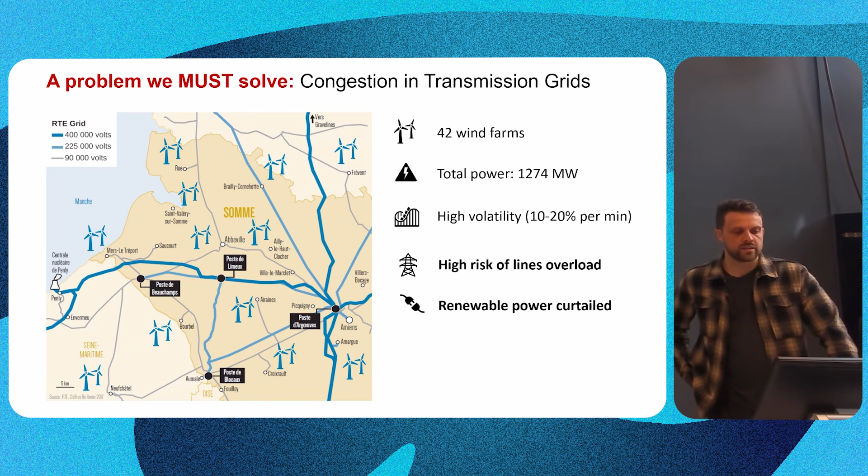This area is particularly interesting because there are many wind farms, 42 different wind farms, and in aggregation they generate over 1 gigawatt of power. And since this power comes from renewables, it's highly volatile, so they can experience oscillations of 20% on the time scale of minutes. So this is a risk for the stability of the grid and for the reliability of the grid, because it can lead to line overloads and damage to the equipment.

So what operators do to counter this is brute force curtailing of renewable power. What this means is they just take renewables off the grid so that they don't cause these overvoltages. And this is a waste, of course, because this is green energy that could be used for better purposes.

There are two possible solutions for this. One is what they call physical reinforcement, meaning just building new lines. Now they can accommodate more capacity, so renewable energy is not wasted anymore. But this is very costly, as you can imagine.

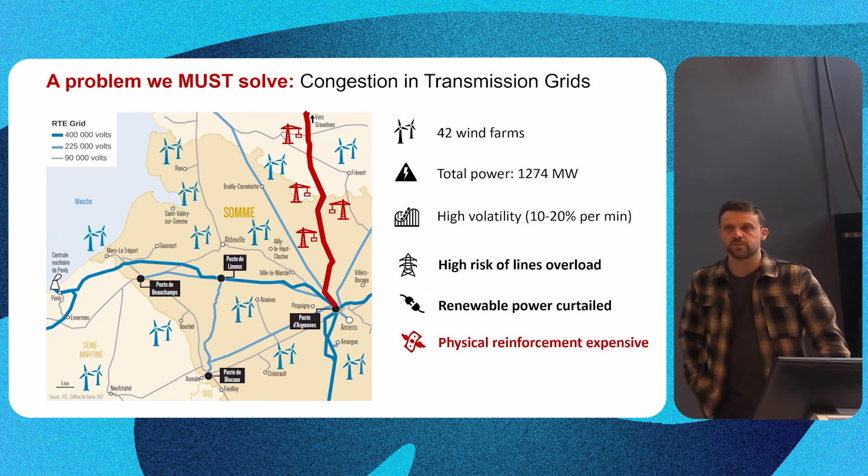And the second option is what they call virtual reinforcement, but what we control theorists would call control. This essentially accounts for using the assets on the grid, so generators, flexible loads, energy storage devices, to stabilize the grid in presence of this renewable generation. What this means in practice is modulating the set point at which these assets operate in order to make sure that the voltages and currents of the line stay within the limits. And this is of course cheaper because there's no major construction project involved. It's just applying smart control into the way we operate existing assets.

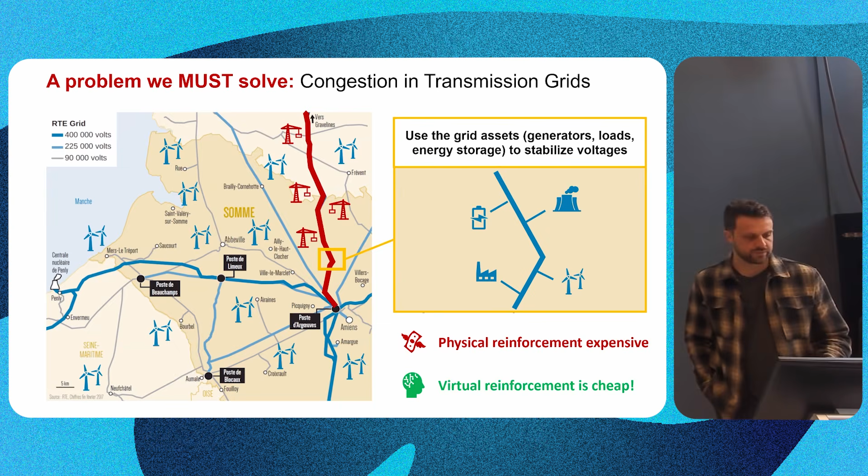Let's take a look at this problem, but from a math point of view. So what this really is, is a steady state optimization problem of this sort: we're looking for minimizing a cost function phi by choosing judiciously these control inputs U.

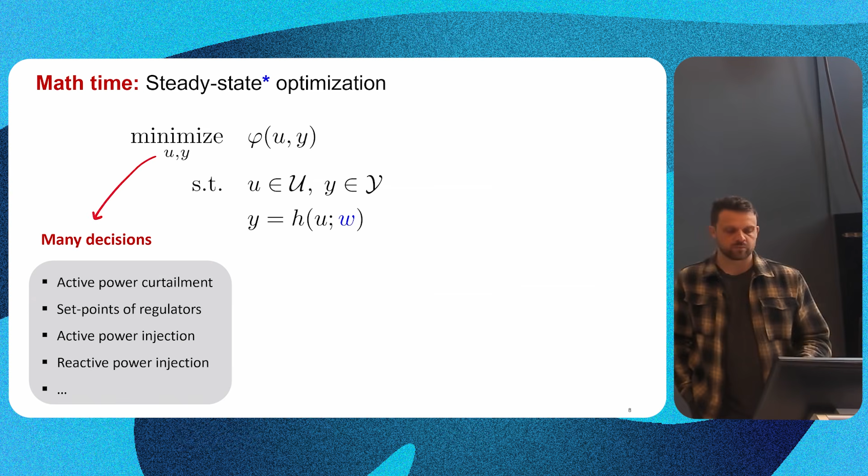These control inputs could be many things: for example, active power curtailment, set points of the regulators, active and reactive power injections of these assets that operators have on the grid. And the objective could be different things, but usually we minimize the curtailment, so we don't want to waste renewable energy, and perhaps we want to track some operational profiles that are given beforehand.

This is subject to some constraints. There are actuation limits, so we don't have infinite active and reactive power to use to regulate the grid. There are also physical constraints that are more important for us: we want the voltages and currents on the lines to stay within limits that guarantee reliability of the grid. These are the constraints on the Y.

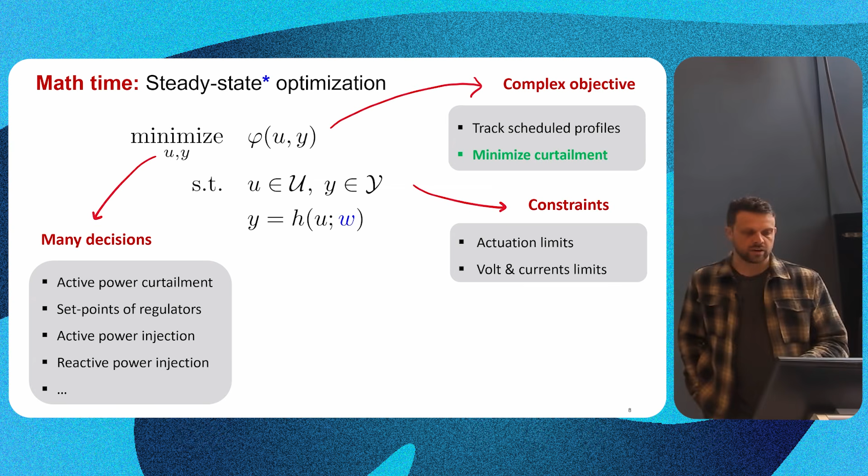I didn't mention this explicitly, but there is of course a direct connection between the control inputs U and the output that we measure in the grid, the voltages and currents, represented here by Y. This connection is through a nonlinear input-output map, H, which represents really the physics of the grid, or in other words, the power flow equation.

In other words, voltages and currents on the lines of the network are a nonlinear function of the reactive and active power that we inject. Not only that, but it's also a function of active and reactive power injected by some external entity that operators do not have control over. We represent that by this variable W, which from a control point of view is an exogenous disturbance.

This could be, for example, uncontrollable loads or variable microgeneration. This is why at the top of the slide we have this asterisk on top of steady state, because the W varies over time. So this looks like a steady state optimization problem, but it's really a parametric steady state optimization problem that varies over time. What operators are interested in is not just regulating the plant, the transmission grid, but tracking solution trajectories of this slowly time-varying optimization problem.

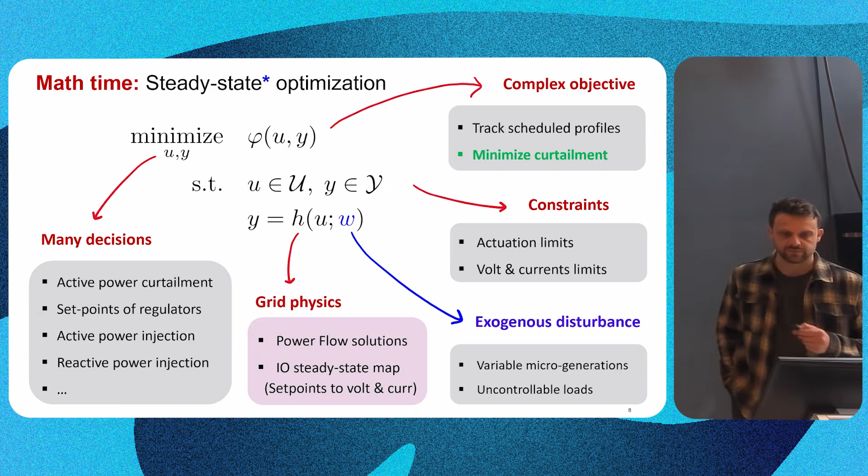Let's take a look at what industry does right now. We would paraphrase that as control theorists as offline optimization. They use forecasts of the disturbance that happens on the grid over the next day, and then they use optimal power flow solvers. We can represent these solvers as an interconnection between a model we have of the grid, this hat H, a power flow model, and some optimization routine that uses this model to find the optimal injection in the grid.

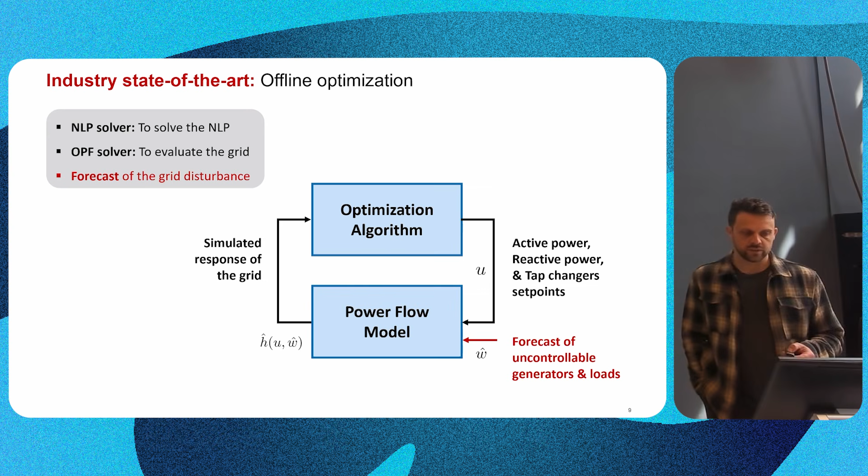This is done completely within your computer. There's no implementation; it's run until convergence. Then the outcome of this routine is deployed on the real system, which operates, of course, online.

We would call this feed-forward optimization, essentially, in control. There are some problems: it's heavily model-based, so we need a model of the grid in order to run this. It could be computationally intensive if you try to solve this problem on the scale of a whole country or a continent. And we know, as control theorists, that feed-forward is not robust to model uncertainty and also to external disturbances.

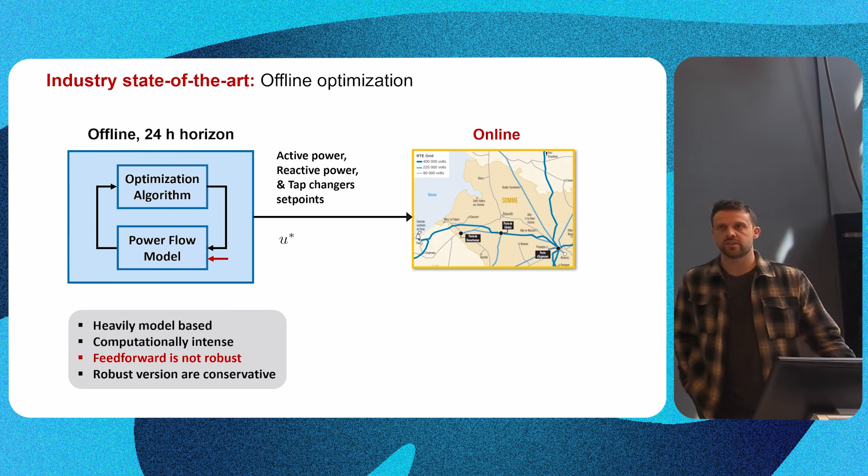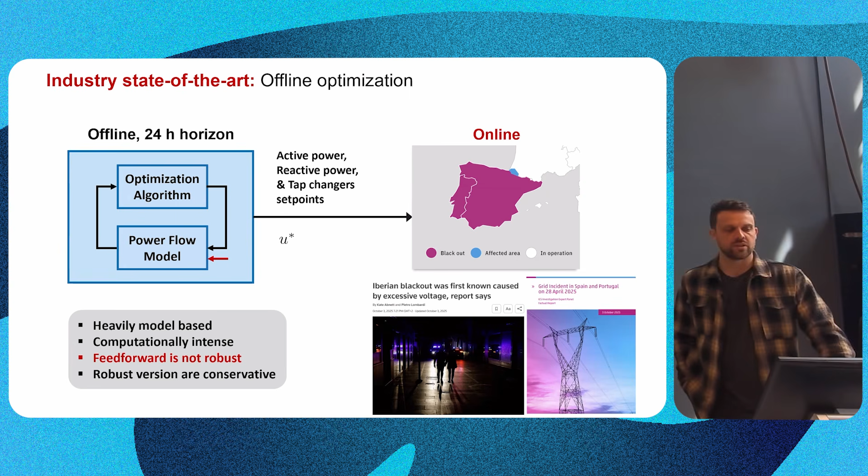You may have heard of this episode on the Iberian grid, I believe in April or May of last year, that led to a major blackout. Actually, one of the reasons why that happened is excessive voltage on the grid and inappropriate response by the operators. So this is a very relevant problem at the moment.

A solution that has been proposed in the literature is what we call online feedback optimization. The main idea is to just get rid of the model of the physical grid and directly connect our optimization routine with the real physical system. This creates a cyber-physical interconnection between an optimization routine and a physical plant.

What are the advantages of this approach with respect to what we've seen before? There are a few. It's computationally light — we don't really need any model of the grid. We just outsource the evaluation of the model to the physics itself.

Feedback has this forgiving nature. So even if you have, let's say, wrong information about measurements or input-output models, the feedback automatically corrects it. And it's almost model-free. I'll get back to that.

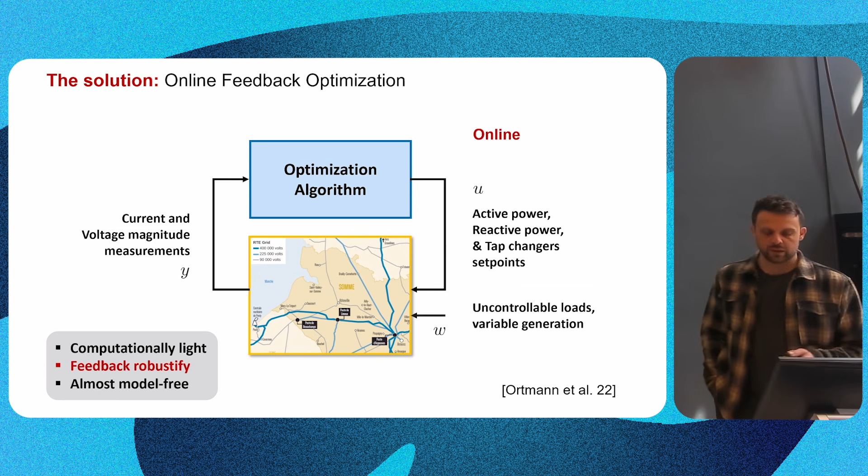So it's a great thing, but let me dive a little bit deeper into this so you can have a better idea on how these methodologies work, because so far I've kept everything very high level.

This is the steady state optimization problem that operators are trying to solve - I've shown it before. For the purposes of keeping this derivation neat, we get rid of the output constraints, and we can use, for example, some soft constraints. So instead of enforcing it in a hard way, we just put an extra cost, an extra term in the cost function that penalizes deviation.

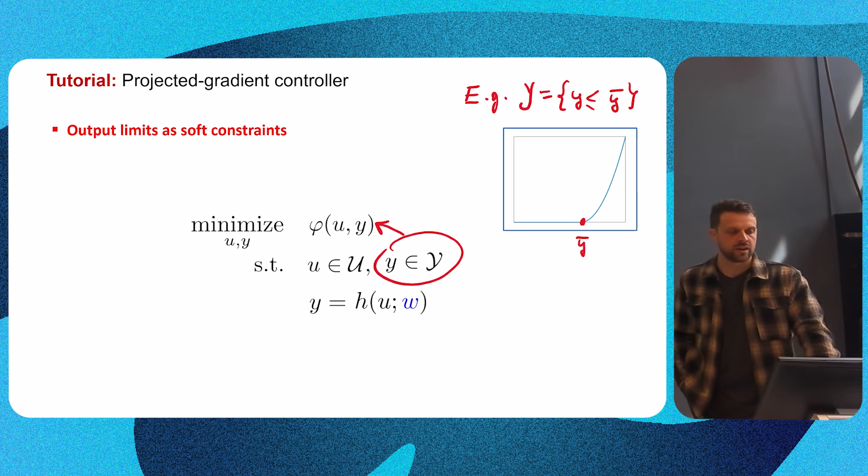Here on the top right of the slide is an example of this. We're in this simplified setup. The next thing is to just get rid of the y - we see the y, it's a redundant variable.

We can just substitute it into the cost function. Now we're optimizing our u. Then at this point we have an optimization problem that we can probably solve with some routines that we know. Do you want to guess what something that you could run onto this to find a solution?

An optimization problem? An optimization algorithm? Gradient descent. Yeah, so gradient descent with projection, because we have constraints on the u. So this is something that we can run.

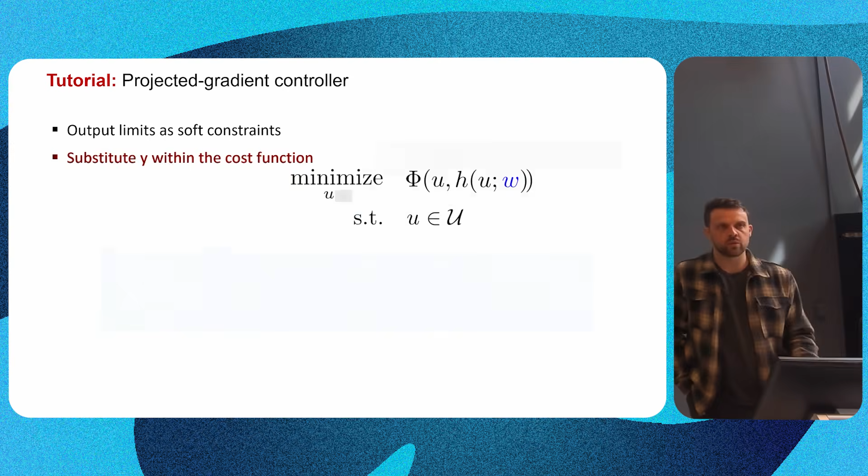This is how it looks like. So the next estimate of the solution of this problem is given by taking a step of length gamma towards the descent direction of the cost function, so the gradient, and then we project everything into the constraints u.

The expression in the second line essentially shows you how the gradient looks like, because we have a composite objective function, and this is how we can work out an expression.

So we have a composite cost function with two arguments. So we have to take the derivative, the gradient with respect to the first argument, and then the gradient with respect to the second argument.

In order to derive it, we need to apply the chain rule, because it's a composite function. So we take the Jacobian of the mapping H, we transpose it, and then we do the multiplication for the gradient with respect to the second argument.

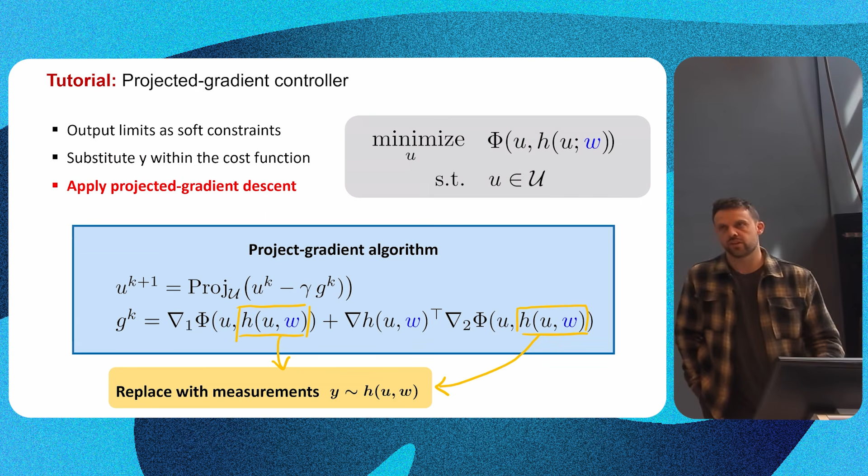Now, here's the kick. What feedback optimization does, differently from feed-forward, is it does not rely on a model of the grid in order to evaluate the H, but just replaces that with measurements that you take from the real grid. These are essentially, if you have very good timescale separation, very close to the actual steady state of the system.

There's another bit that I didn't mention explicitly, but it's very important - this gradient of the steady state mapping of the system that people call input-output sensitivity. This is something that is, in theory, not given a priori, and at least in the context of the grid, it can be derived, or a good approximation of this can be derived offline just based on the parameters of the grid itself.

The difference with respect to having dynamic models is that you don't need to know the dynamic models. You can derive this without knowing the real dynamics of the system, just based on the parameters of the grid, like impedances, resistances, etc.

Okay, we have this routine, and then we can write it explicitly as this cyber-physical interconnection. We take the measurements from the grid, currents and voltages, feed it into the projected gradient iteration, and then what comes out of this iteration we feed back to the grid.

There are several conceptually related works to this. The first that comes to mind is extremum seeking. The main difference is that in extremum seeking you have a less stringent assumption, in the sense that you don't know the gradient, you cannot evaluate the gradient at all. So you need to rely on zero-order information in order to estimate it.

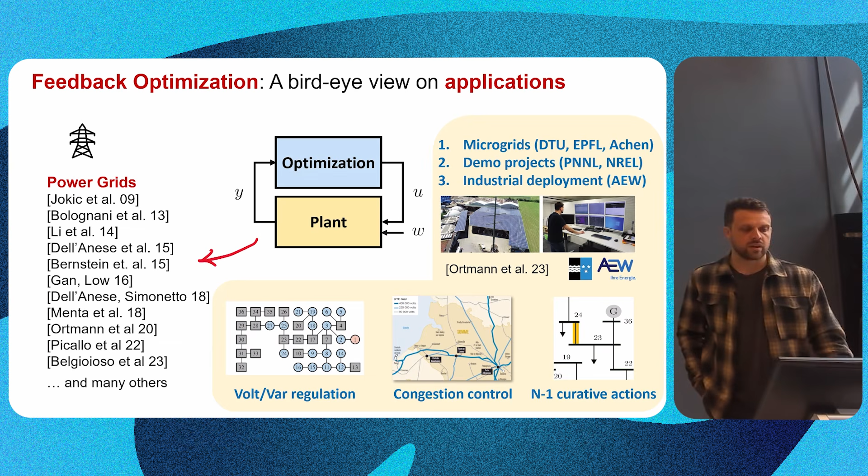For example, it's been proposed also for dealing with N-1 curative actions, essentially resilient action when one link of the grid fails. Also Volt/Var regulation in distribution systems, and it has been deployed in real microgrids by demonstration projects. My colleague Lucas also deployed it in a real distribution system in the canton of Aargau in Switzerland, and it's currently working and serving 100,000 people, regulating the power grid there.

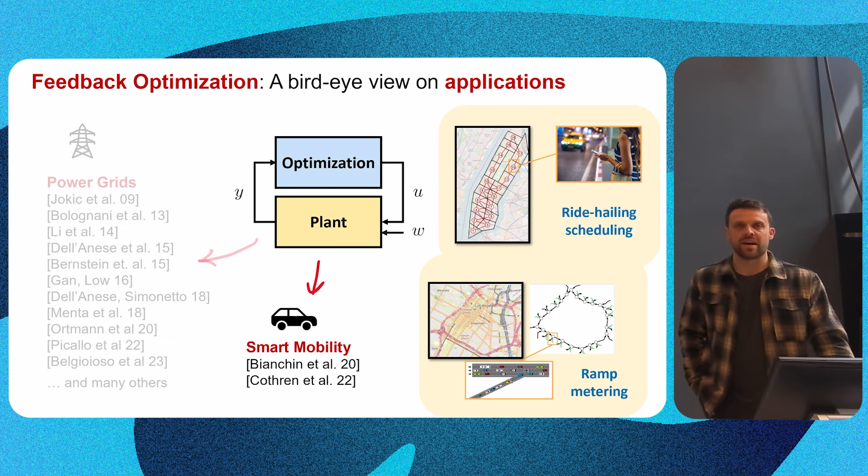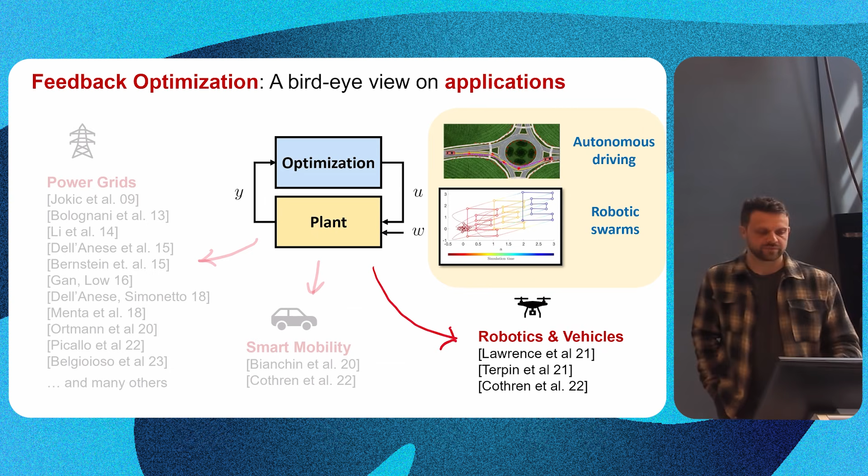There have been some applications in robotics for autonomous driving and coordination of multi-agent autonomous systems, and some applications to industrial processes. I don't know much about that, but I'm sure Marta, for example, knows way much more.

Okay, so applications are a lot and very interesting, but what about theoretical guarantees? Do we have a theoretical understanding of what happens when we interconnect an optimization algorithm with a physical system in this way?

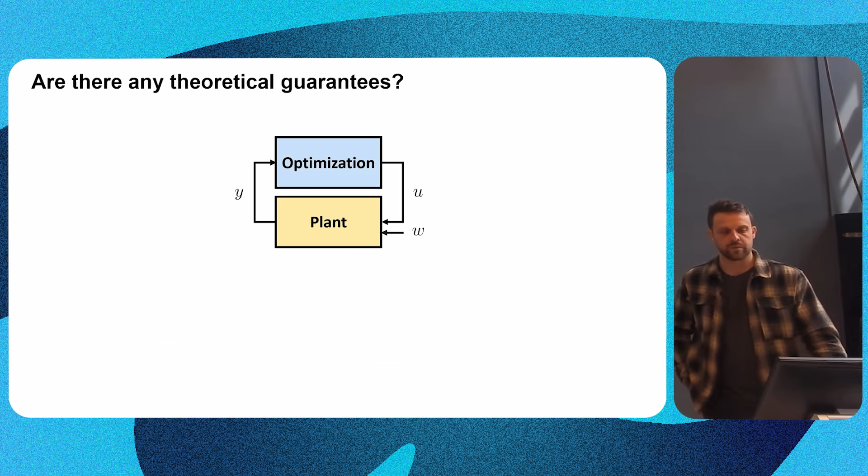So there are various questions that have to be considered. I would say that probably the most popular and important one is closed-loop stability. We know that when we interconnect two dynamical systems, the interconnection could be unstable even if the two pieces taken singularly are stable. So we would like to come up with some guarantees that show us that the interconnection remains stable and the optimization/controller does the job that we want it to.

Tracking performance: we mentioned that we are not really interested in just regulation to a steady state, but we want to track solution trajectories of this slowly time-varying steady-state optimization problem. So we would like to know how good we can track these solution trajectories, what the tracking error is, and if there are any guarantees there.

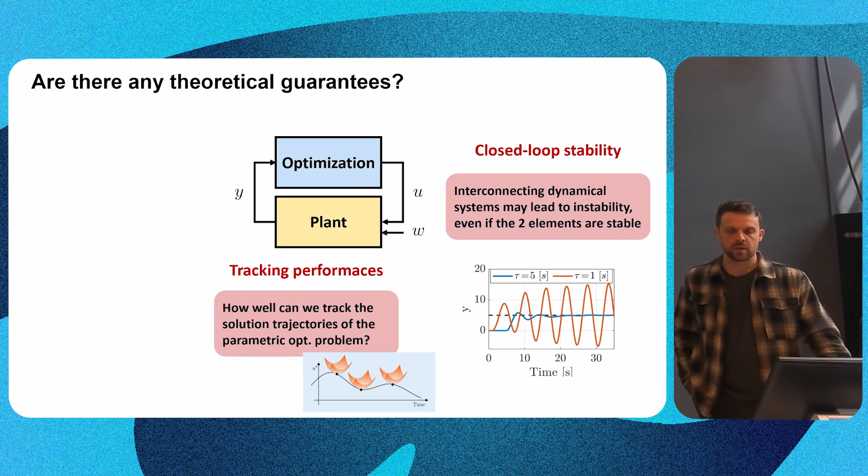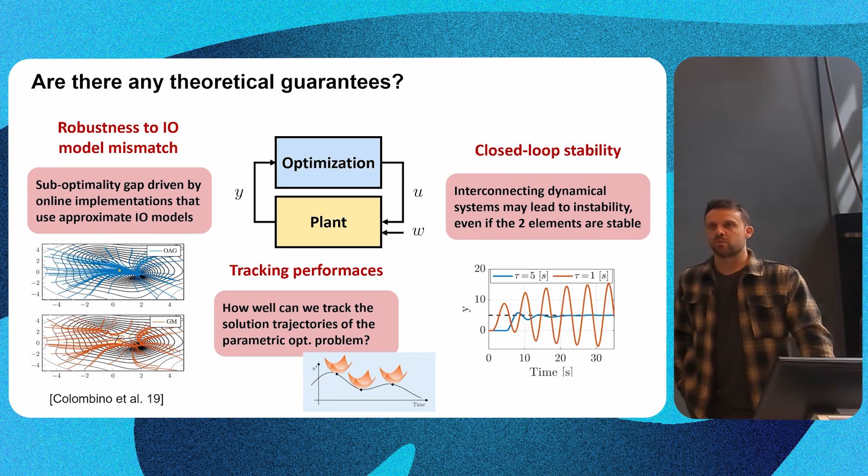And another one that is very fundamental but less investigated is robustness to input-output model mismatch. The underlying assumption of feedback optimization is that we know the sensitivities, the input-output behavior of the system. This is not always true in practice, and when there are errors there, you would like to have some guarantees that things will still work well. There's a nice paper from Marcello Colombino that studies that, and I believe not much more after that, but it's an interesting point.

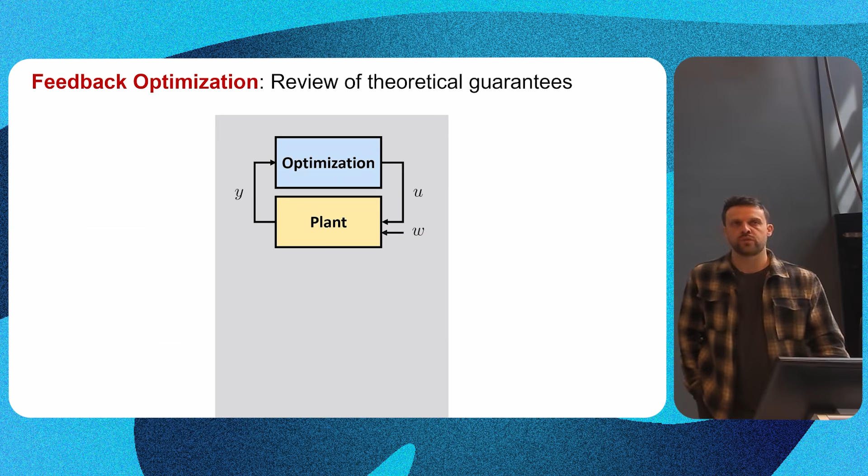Okay, so let's focus on closed-loop stability and tracking performance. I just want to give you an overview of what's out there in the literature regarding these theoretical questions. I would say we can categorize it into two main blocks.

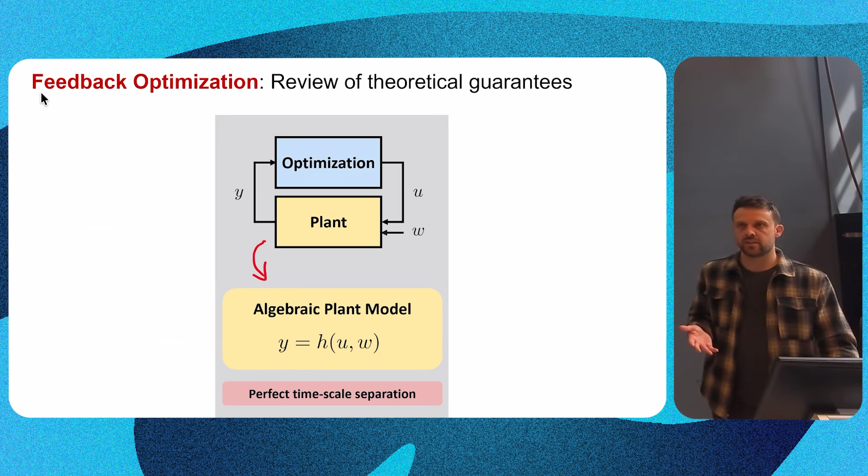The first one works under the assumption of perfect timescale separation. So they assume the plant can be represented by an algebraic map, giving instantaneously the output at steady state of the plant once we give the input and we know the disturbance. And the algorithm that we're trying to deploy is just an iterative algorithm from optimization. Gradient descent was one, but you can think about others like primal-dual methods, or second-order methods like SQP, or things that are sort of related to game theory like best-response playing, etc.

Under this framework, there have been many papers and many works that study closed-loop stability, which in this case maps one-to-one onto convergence analysis of classic optimization, because you're looking at an optimization algorithm just with a nonlinear constraint. So tools for optimization are enough to study stability.

And you can extend this to time-varying problems by developing tracking analysis, and you can borrow tools and analysis from time-varying optimization.

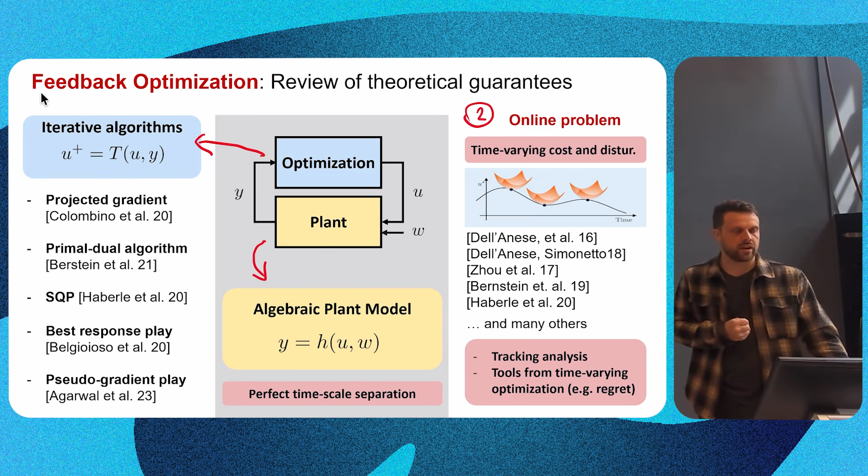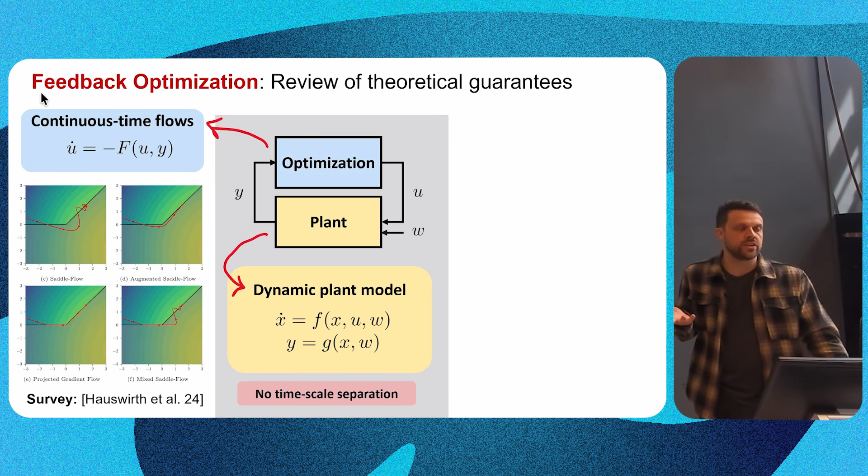The second class of analysis relies on the assumption that there is no time-scale separation. The plant is a dynamic model, a nonlinear dynamic model, and they look at optimization routines not as iterative algorithms anymore, but as flows, like gradient flows in continuous time. The reason is that analysis is easier because both blocks live in the same domain, and you can build analysis based on Lyapunov and LaSalle tools to study stability, closed-loop stability, this continuous-time interconnection.

And you can extend it with input-to-state stability tools when it comes to time-varying problems.

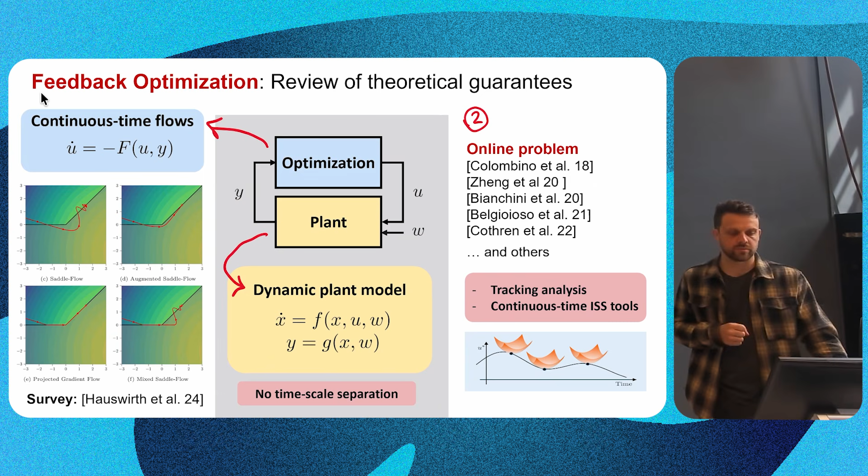What we are interested in here in this talk, and what I'll tell you more about in the remainder of this presentation, is this approach to online feedback optimization, but targeted to complex multi-agent systems. We're interested in building an analysis that is worthwhile and useful when the systems we're trying to control are large, multi-agent, and distributed. And this adds more complexity to the analysis.

The reason being that the iterative algorithm we're trying to deploy, it's really an iterative algorithm. You can think of a very complicated routine that you implement on your computer that calls QP solvers and other implicit routines for optimization.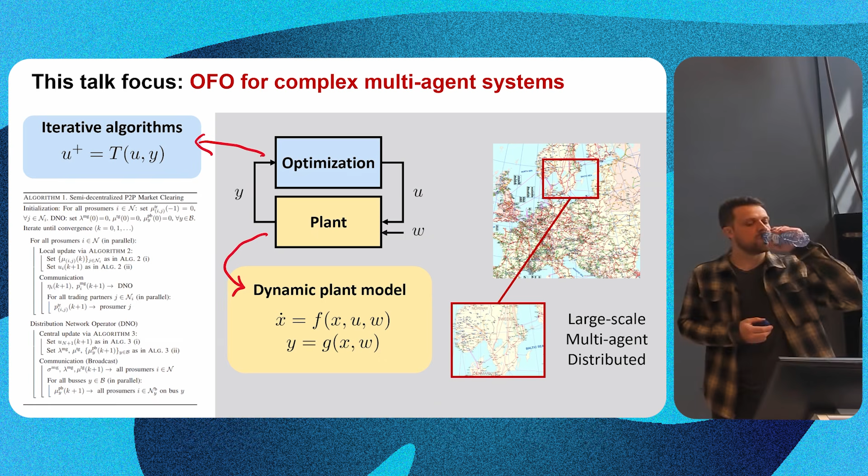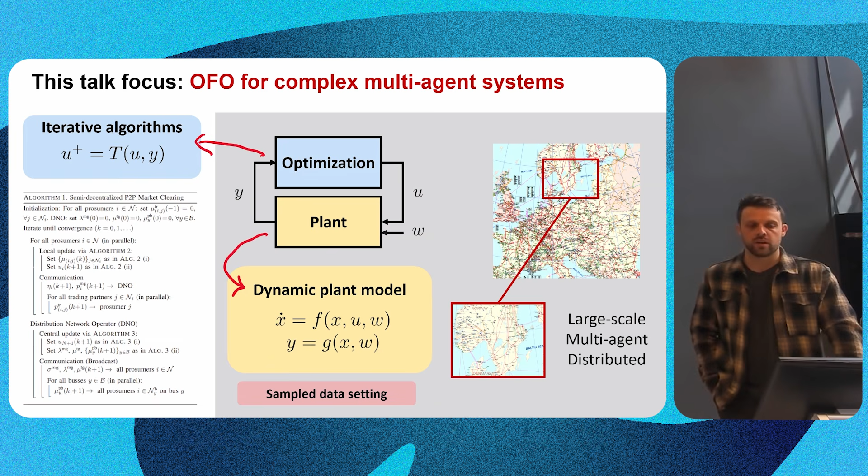So what we have is a sampled data setup, where the plant lives in the continuous-time world and your optimization routine lives in the discrete-time world. And the analysis has to be built accordingly. This was one of the challenges I'm going to talk about.

There are others, of course. For example, the decentralized or distributed implementation of these approaches, when sensitivity is not known globally but has to be reconstructed by local agents. Another important problem for this setting is the tuning of the step sizes. When you have large-scale distributed systems, you want adaptive algorithms to tune the hyperparameters of these controllers to make things work well.

But I will focus on the first two challenges: sampled data analysis and a modular design framework that perhaps goes beyond optimization. The reason is that the kind of algorithm you want to deploy to control your system might vary a lot depending on the system itself, the distribution of the agents, or the properties of the problem you want to solve. So you want to build an analysis that is modular, that takes blocks like the optimization block and the system block and gives guarantees based on general design principles of these singular blocks.

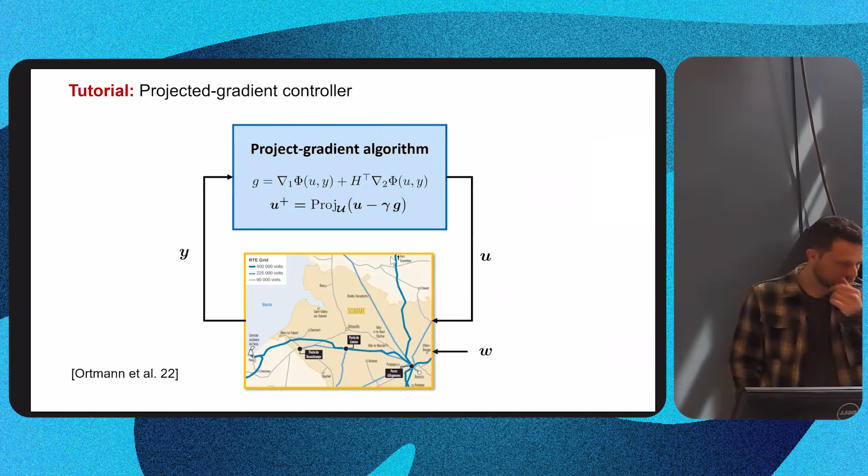At some point there was this capital H matrix that describes the input-output map. Are there cases in which this is a constant matrix rather than a function of U and Y? Yes, so if your plant is an LTI system, then it's fair to say that the sensitivity is a constant matrix. If you have a nonlinear plant, that's not true anymore.

So what practitioners do is build approximations that work well, let's say, in numerical examples. The nice thing about this approach is that the feedback is sort of forgiving, so even if you have some mismatch in how you compute this sensitivity term, the interconnection remains stable. The feedback sort of accounts a little bit for this model mismatch.

And in the nonlinear case, this approximation is meant to be around the steady state. I guess the operating point that you want the system to be at, yes.

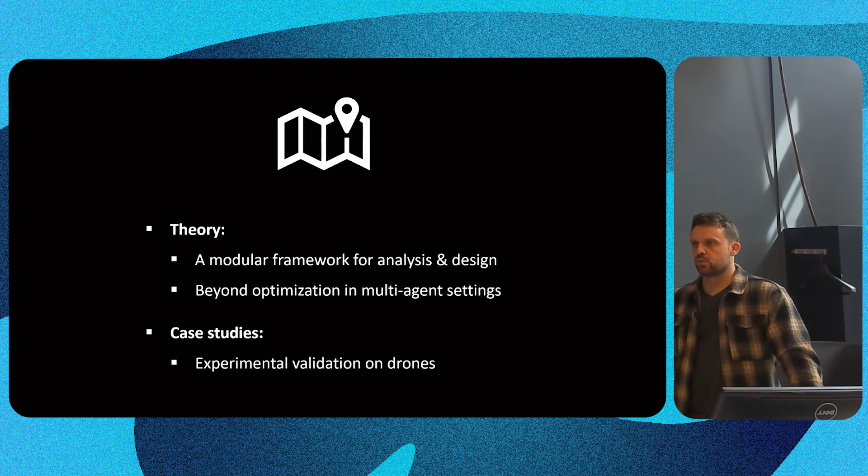Related to that, assume you receive the W from the outside. In this case, the grid, it's based on the predictions. Is that correct? Because you still need W to compute, it's kind of a model, right, for the gradient?

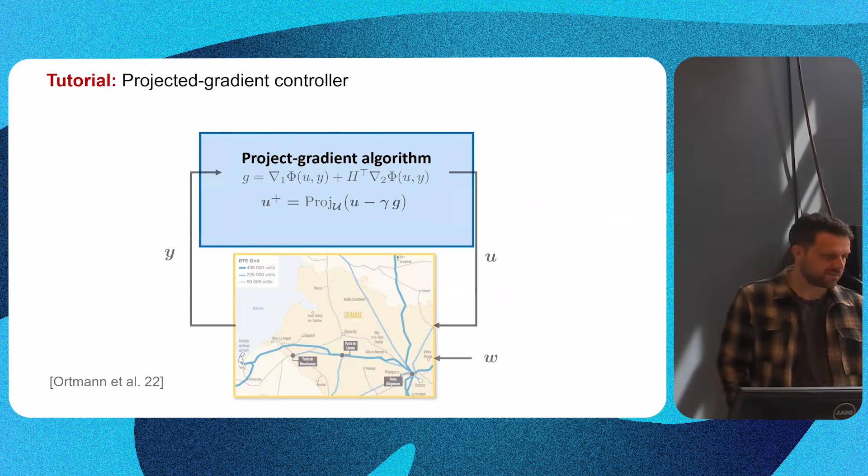I think maybe the previous slide, one of the previous, sorry. Before you call it capital H, yes. It's still, this is a model, it's a sensitivity that you call it.

So in practice you're getting this from the predictions, or also you're estimating the disturbances somehow. How does it work? It's really problem dependent how you build these input-output maps. In certain applications like power grids, you can have good approximations based on the parameters of the grid, like the impedances and the reactances of the lines.

You can build an approximation which works well in practice. For LTI systems, you can construct it from data, perhaps input-output data. But in general, you don't know it, and so you need to rely on approximations.

I'm curious about the specific case of the grid, because these are like the micro producers against the demand. I'm not sure if we're measuring that, we're measuring Y, not W. So where are you getting this from?

So the approximation, in short, that you build is not based on W or forecasts. It's based just on the parameters of the grid. Oh, okay.

When it comes to replacing the yellow blocks there, you don't need to measure W directly, just measure Y, the output of the grid. I'm asking about the red one. Exactly, so that one you build without forecasts. You build an approximation of that just based on the parameters of the grid, and you hope that it works. Okay, clear, thanks.

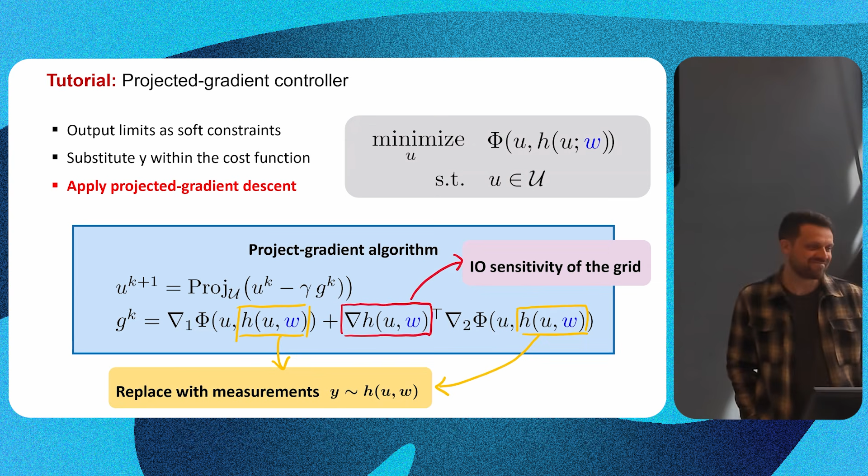I have a quick question. Do you have a sense, or can you say something about what the impact is on the actuators of the system? You're doing the optimization, and you would assume that the more you know about your actuators, or also the demand side of your system, the more you can take them into account in order to limit how much they are being strained.

So I'm coming from a background of wind farms, so these wind turbines resonate with me. If there are long time scales between the turbines, but the grid is operating at a much higher frequency, if one turbine does something, the second turbine will feel with a 10-minute delay what the first turbine did. If your optimizer or your online feedback optimization is running at a really high frequency, you upregulate or downregulate the wind farm a lot, and the turbines have to do a lot in order to match that high frequency signal, instead of having a longer time horizon to maybe have a smoother actuation signal. That's where I'm coming from.

Yes, absolutely. So the performance in terms of tracking and stability guarantees depends on the timescale separation between these two blocks. You need to modulate it until it works well. That's why I mentioned adaptive tuning of step sizes and perhaps also sampling time of this approach. It's very important to make things work smoothly.

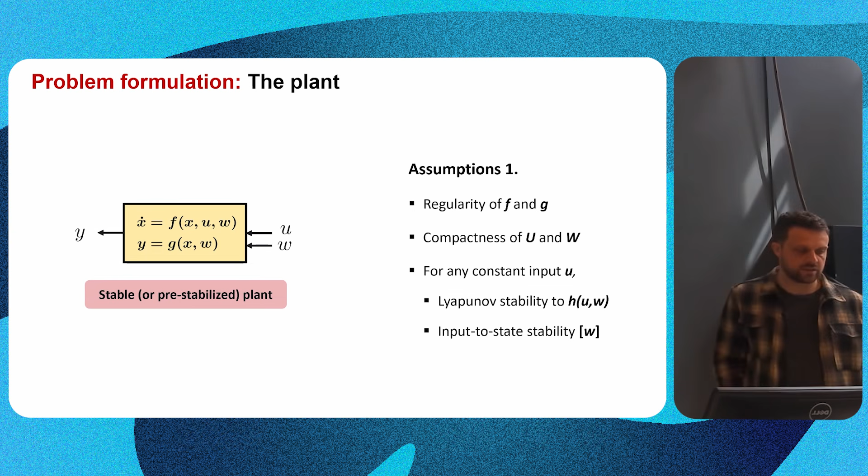So we can paraphrase all this as we need a stable or pre-stabilized plant. Why pre-stabilized? You could have an unstable system, but you know how to stabilize it. You can close the loop with something that you know stabilizes, and that takes care of just the stabilization. And then you can run our feedback optimization routine on top for optimality purposes.

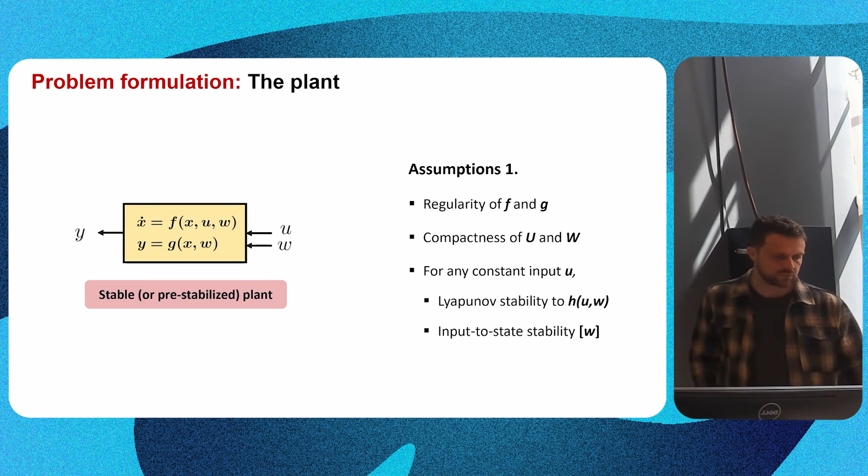Okay, let's take a look at the control objective. This is a bit critical, so I need to break it down for you. So far we have seen steady state optimization problems. Here we're looking at the generalization of optimization problems.

This is a generalized equation with a specific structure. This condition captures optimization. You can think about the first order optimality condition of an optimization problem, written as finding zeros of gradients. In this case, the mapping G would be the gradient of a cost function, and A may be something that accounts for the constraints, like normal cone operators.

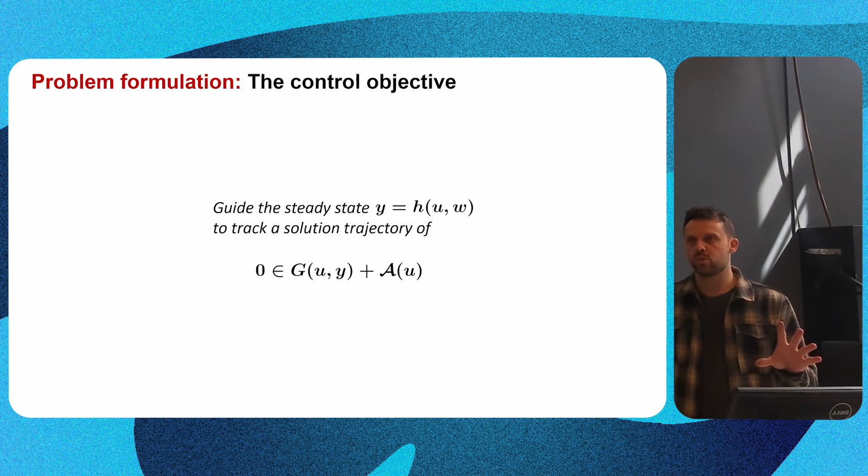But this condition can represent more general problems, for example equilibria in games and other things. So we decided, for the purpose of building a very general setup, to consider this generalized equation as the control objective rather than mere optimization. But again, this captures optimization as a special case.

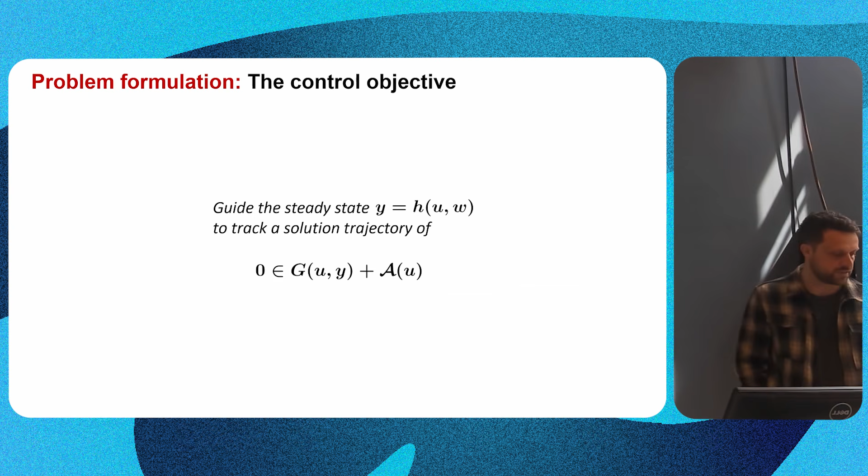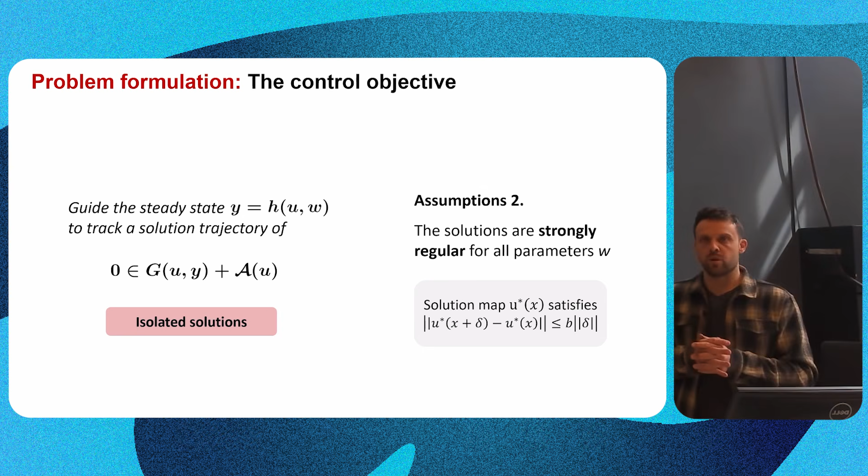The assumption is that the solutions of these generalized equations are strongly regular for all possible parameters W. What it means in practice, if you think about optimization, is that you have isolated the local solution of your steady state optimization problem. So as long as we don't have a continuum of solutions—for example, strongly convex problems or locally strongly convex problems—it's fine.

The fixed points of these are solutions of our generalized equation. This is just a sensible thing—the algorithm does what it's supposed to do, finding the solution.

And then we assume the dynamics of this optimization algorithm—because this algorithm can be seen also as a dynamical system—are locally robustly stable. So they converge to local optima in a robust way. If we perturb the optimization routine with some W, it will still converge towards a neighborhood of the solution. It won't blow up.

And then some Lipschitz continuity of this general mapping T that describes the optimization algorithm. Just to fix the ideas, this T could be the gradient step, the example you saw before. So we paraphrase this assumption as robust convergence of the algorithm.

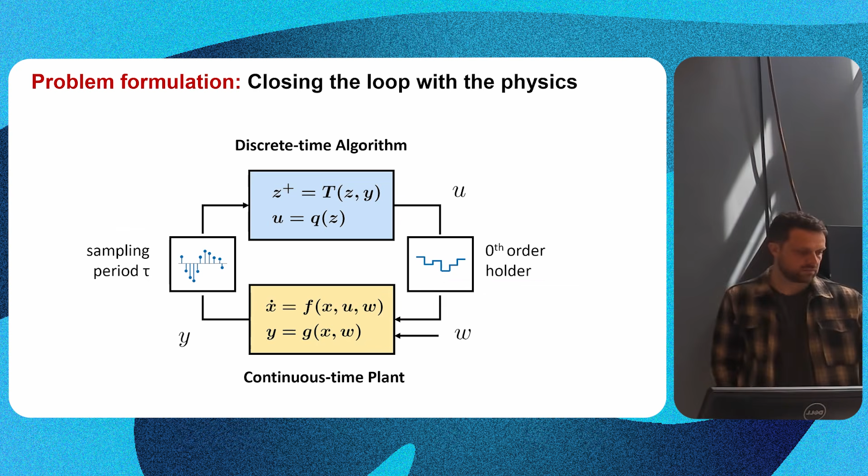Excellent. So we described our two blocks and the assumptions we made on them. Now we need to interconnect them, but one lives in the discrete time world, the other in continuous time. So we need a zero order holder, and then we need the sampling from the continuous time plant to the discrete time one. So we live in this sample data setting. Let me check the time.

Okay, we're running a bit short, so I'll be very brief on this part about the analysis. The way we build the closed loop stability analysis starts with discretizing the plant, so now we have the two blocks living in the same world, discrete time systems.

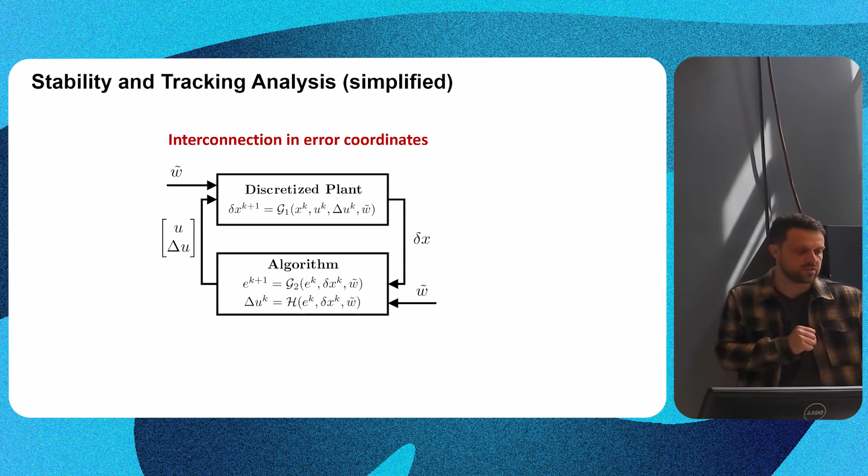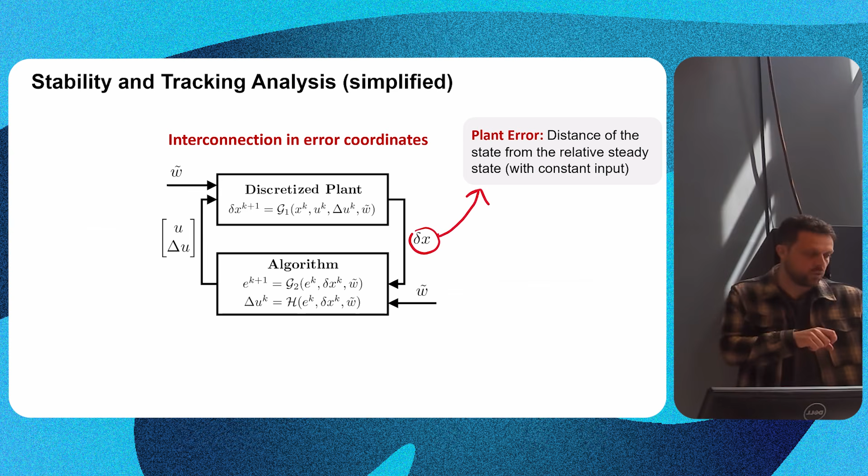And we look at the problem in error coordinates. So now the state of the upper block is the plant error—the distance of the state from the relative steady state with constant input—and the optimization error, how much we're distant from the solution of the generalized equation. So let's translate the interconnection in error terms.

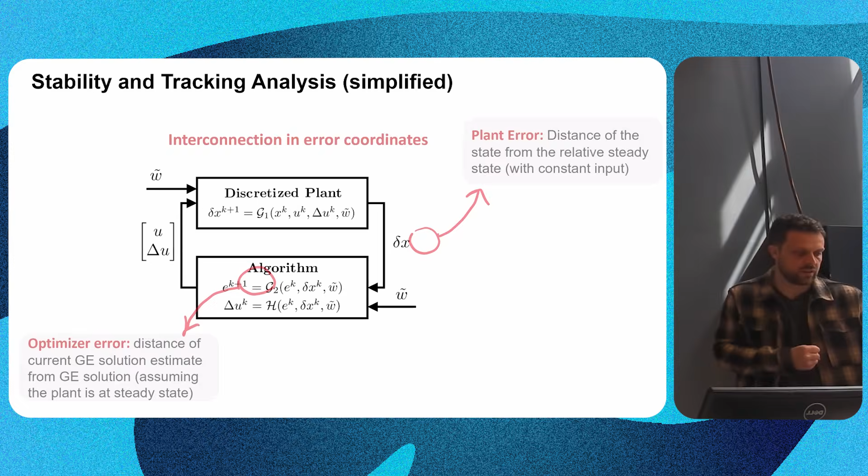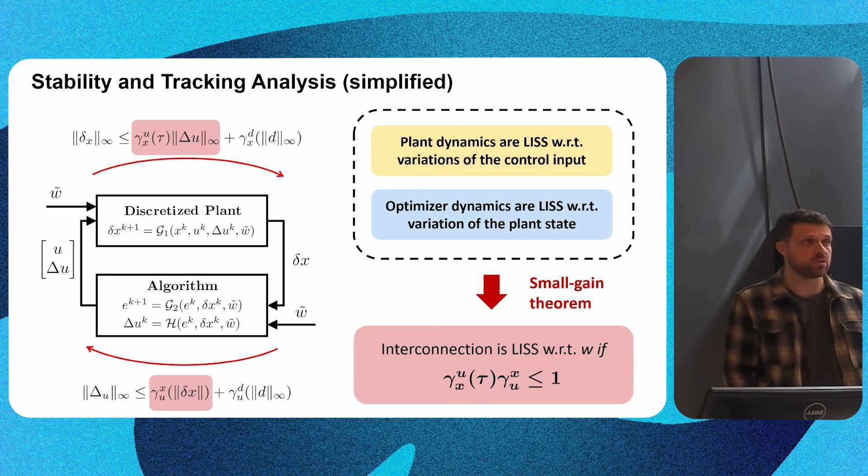And then I'll be very brief here. The idea is to use the small gain theorem. So we use the assumptions of input-to-state stability of the plant and the algorithm, combine them together using the small gain theorem, and we get this condition, where these two parts are the asymptotic gains of the two blocks. If this is satisfied, then we know the interconnection is input-to-state stable with respect to the disturbance.

Let me focus briefly on this condition here. This is the gain, the asymptotic gain of the system, and it's a function of tau, our sampling time. So we can modulate this by changing the sampling time. In particular, this decreases when the sampling time increases, so if this decreases, we have a better chance of having this condition satisfied.

Whereas this is the algorithmic gain, right? And it's a function, actually, it's also a function of something that we can control, although here it's not written explicitly.

By changing the hyperparameters of the algorithm, we can also change its gain. So in short, by modulating the sampling period of this sample data interconnection, we have a way of guaranteeing closed loop stability of the interconnection, under, of course, these three main assumptions.

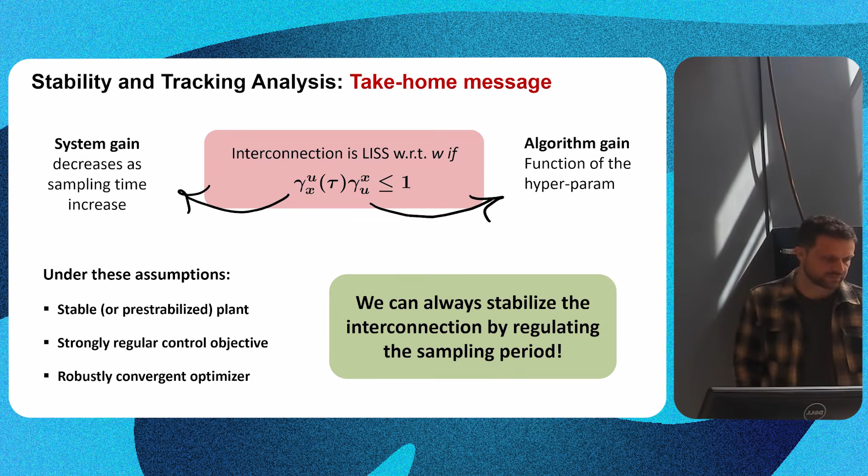Excellent. A brief check whether to see if these assumptions that we have are strict or not. So we build a very simple example. In this case, the objective is what we would say set point tracking. So we're interested in minimizing the distance of the steady state of the system from a reference, with some input constraints, right?

And the system is just dynamical systems governed by the second order differential equation. So it's a second order, it's a two-dimensional state space system.

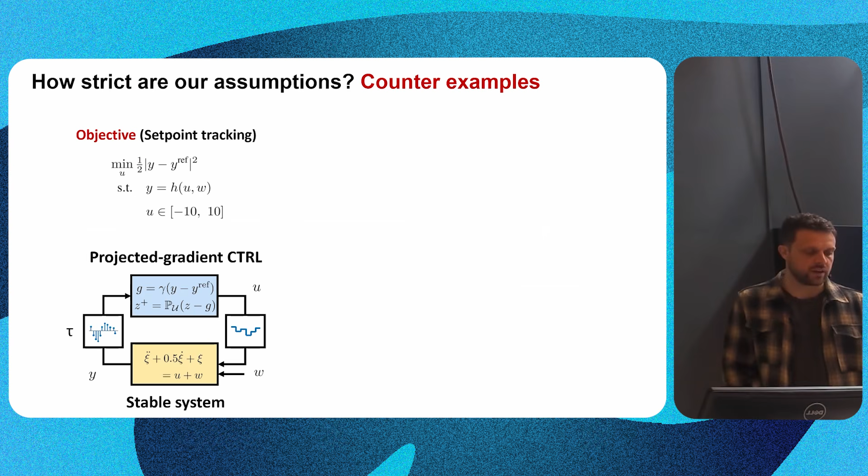We first verify that closing the loop can indeed lead to instability. So the two blocks taken singularly are stable, but if we interconnect them and we modulate the sampling time in a wrong way, we get oscillations, right? So we need to reduce the sampling time, increase the sampling time enough in order to retain stability.

And the second one has to do with the assumption that our algorithm is robustly stable. We look at this gradient algorithm in the case, I didn't write it explicitly, okay, but the gradient algorithm in the case we have vanishing step sizes. These are popular in machine learning context because they guarantee stability with very weak assumptions on the cost.

But this doesn't work in online context. You can't use these things for control. And the reason is that your controller / optimizer loses aggressiveness, loses grip until the point at which you can't track anymore the solution trajectory.

Okay, excellent. So we built this very powerful analysis. Let's take a look at how we validate it. And we start by a problem in multi-agent autonomous systems. In particular, we look at this optimal coverage problem. We have a set of drones that we want to deploy on a working area in an optimal way.

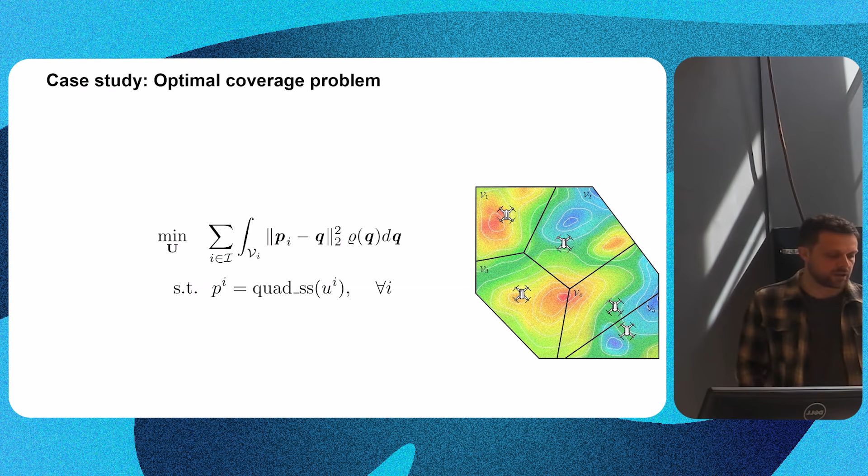We have, of course, some limitation on the input U, which is the reference position that we give to a single drone. The steady state objective is the optimal deployment, and this condition is the steady state condition. So we give reference position to the drones, and then the local controller of the drones will take care of bringing the drones to that specific position. So at steady state, this is just an identity.

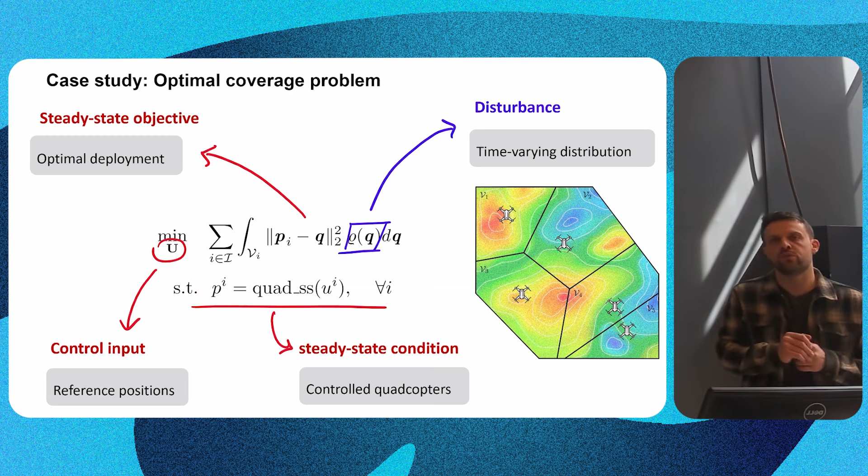And here's the kick. This is not the steady state optimization problem, this is time varying. Because the distribution here on the working area that we would like the agents to track optimally can vary over time, and so the drones need to follow this optimal coverage trajectory that changes over time.

So I had a very talented student who deployed an online feedback optimization controller on this experimental setup. We use these very small drones called Crazyflies. They weigh 27 grams. They're 9 centimeters wide, very, very small.

And we had these cameras here that take measurements of the angle and position of the drones. The communication and perception of the drones is simulated because the drones don't have cameras, they're too small, but we simulated it in the implementation. And the computations are actually on board of the drones, in these small chips here.

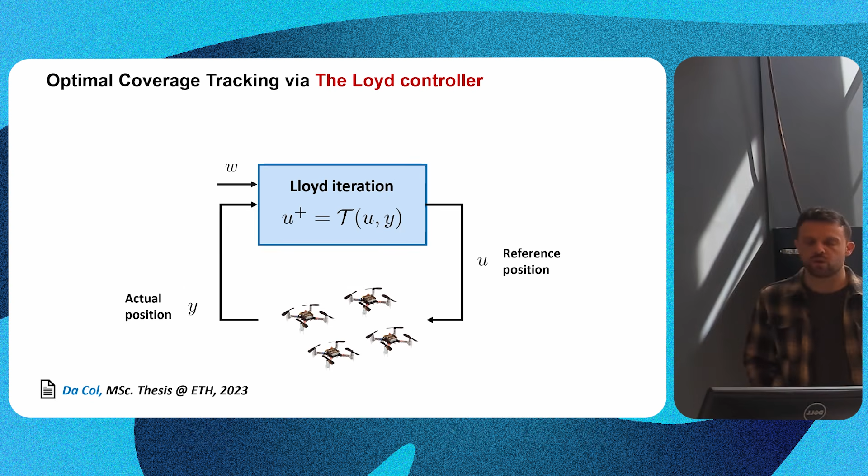Okay, there's a very popular algorithm called Lloyd iteration that solves the problem in the case of, let's say, time invariant case of the problem. But we want to do this online, right? So, again, the drones are pre-stabilized by local MPC. And the density function that we're trying to track is time variant, right?

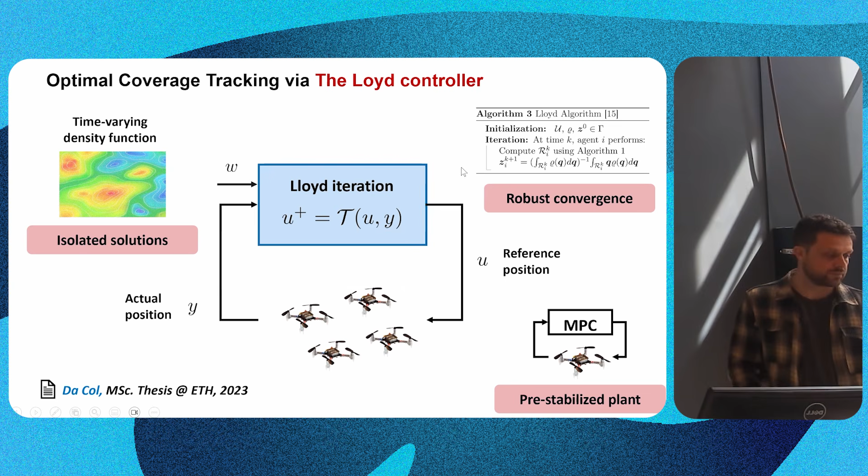Let me skip this one. I'll give you this directly. So this is just a representation of how the drones now, just by virtue of local communications, track the optimal deployment. And here, of course, this is built in post-production, so to speak, and shows that we're tracking this optimal deployment that changes over time, despite this density function that defines the optimal deployment also changes over time.

Right? So essentially, our assumptions are satisfied, and the system does what it's supposed to do. So it tracks the optimal trajectories with bounded errors.

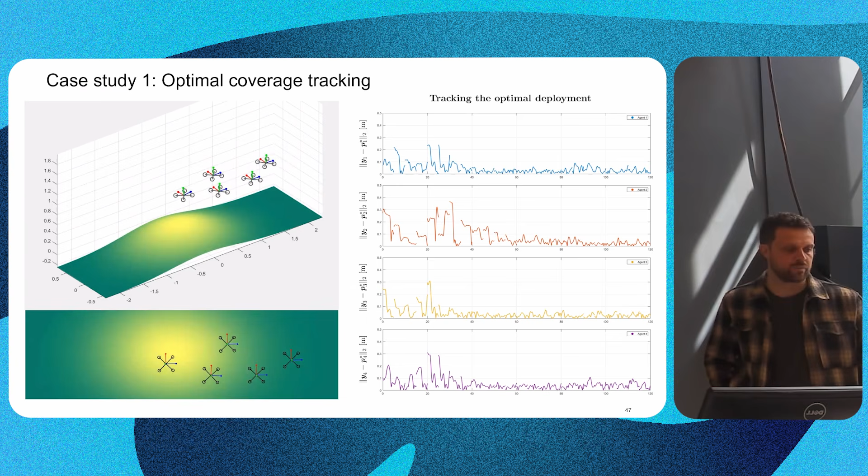Okay, so there are other applications that perhaps are more relevant. We wrote a few papers on application of complex multi-agent systems. One is a tutorial on multi-area transmission grids.

We've seen at the beginning of this presentation that online feedback optimization can be deployed for controlling transmission grids, but different countries have different grids that are interconnected and controlled locally. So we want to understand what happens when these local controllers interact with each other through the physics. This framework we built takes this case into account, and there's an interesting game theoretic interpretation of these situations. I suggest if you're interested in the topic, read this paper.

If you switch things around, the theoretical framework still says something interesting, right? So if now you don't have physical systems anymore, but social systems where the local agents are users of social networks exchanging opinions all the time, we can look at recommender systems as dynamic feedback controllers using the framework we developed. We can try to control opinion distribution in a social network this way.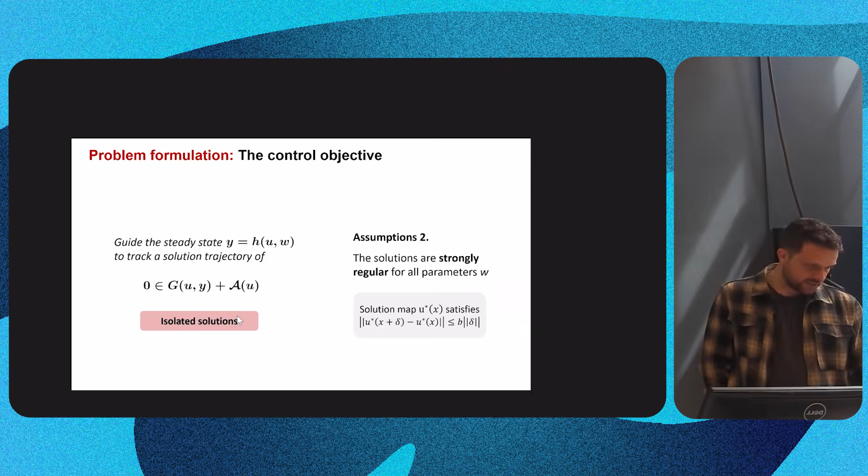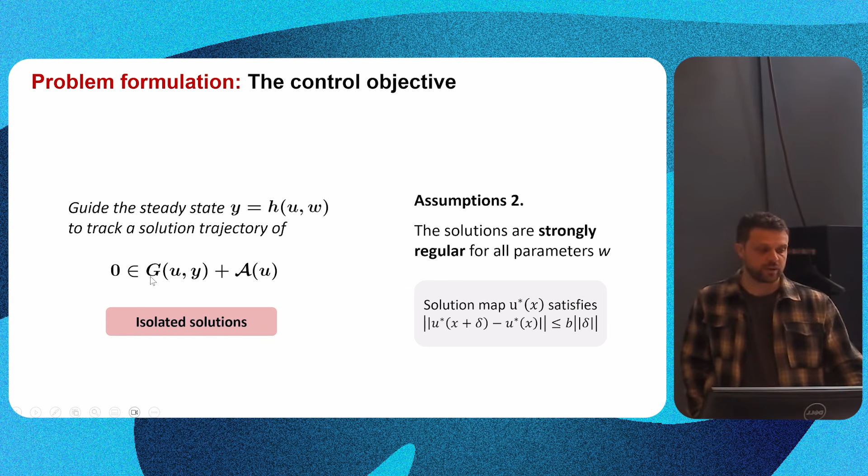Let me find the right slide to answer this. So what I showed before was just an example to make the analytical derivation intuitive. But in this general theoretical framework, we can absolutely deal with hard constraints. I didn't exemplify the sort of optimization problems that this generalized equation captures, nor the algorithms, but it's very general. So here you can have hard-constrained problems as special cases of this generalized equation, and you can have algorithms, also second order methods like SQP or Newton steps, that can solve this constrained problem.

In that case, as far as I understand, some of these theoretical results do not necessarily hold. Is that correct? No, the analysis we built covers these cases. Okay. So you have theoretical guarantees for problems with hard constraints, and algorithms that solve hard constraint problems on the output. Thank you.

Yes, ma'am. So to follow up on that, how can you have strict output constraint satisfaction without knowing the mapping exactly?

Asymptotic constraint satisfaction. What do you mean by that? So it's not MPC, where you satisfy at all times the state or output constraints. You can violate constraints if you don't know the mapping, right? Yes, you can violate them online, but asymptotically you converge to a feasible solution. It's hard, if you don't know the dynamics, to satisfy constraints on the state or output online. MPC does so, control barrier functions maybe, but they're all methods that rely on knowing the dynamics of the system. So if you don't, everything depends on the model, right?

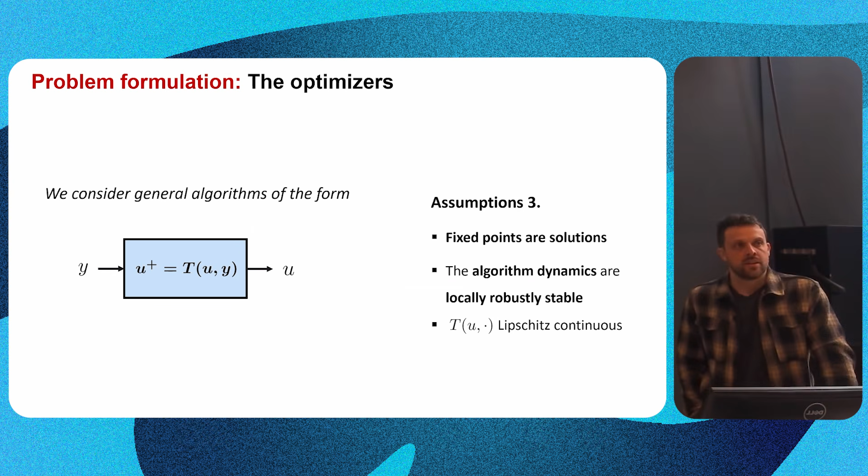I'm curious about your observation that diminishing step sizes break the whole loop. Does that mean that when you have diminishing step sizes, your small gain is actually not finite, or you don't have an input-to-state stable algorithm? Is that the case? Yes. So again, this has to do with the assumption that your algorithm is robustly stable. This is not the case if you have vanishing step sizes, because the aggressiveness of your algorithm vanishes asymptotically over time. So if you have a disturbance within the algorithm, this W can blow up the whole thing.

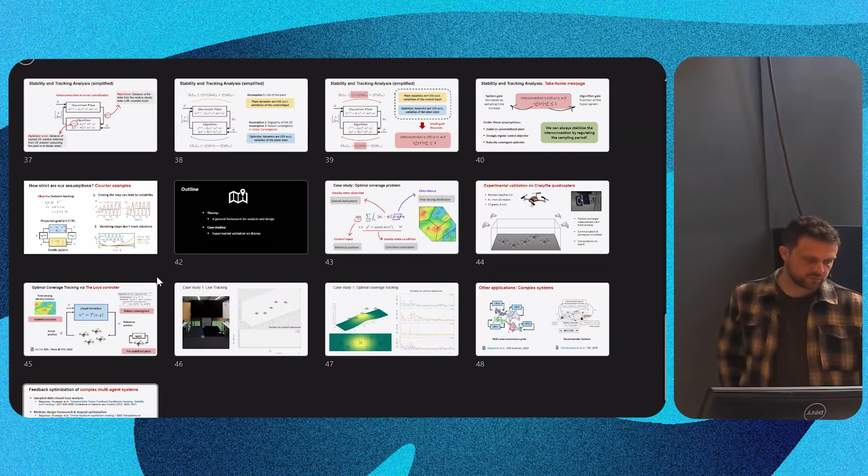In the multi-area case, where we have multiple of those loops between physical system and discrete time algorithm, would you think we could apply the small gain theorem separately so that we allow for different sampling times over the different sub-areas?

I don't know, I don't feel comfortable guessing. One may try, but I don't know what comes out of that, to be honest.

The analysis should be made from a centralized point of view, at least the way we constructed it. The game theoretic algorithm needs to be robustly stable, and the interconnected system needs to be robustly stable already. I'm thinking of an overall gain that depends on the individual local gains, and as long as the total one is less than 1, then the local ones might have different sampling times. Yeah, I guess one could try to build such an analysis. It would probably be useful for distributed systems.

All right, thank you. Yes, can you talk a little bit about scalability? What's the scale of the systems that you can apply your method to?

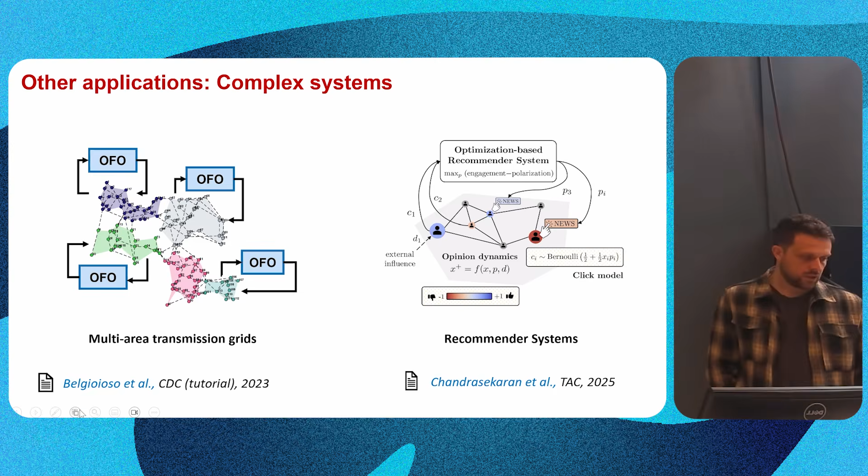It's computationally quite light, because if you contrast it to MPC, where you solve an optimization problem over a long horizon, here you just apply one iteration of an optimization routine. So you can get very high dimensional. This is work of Lucas Ortmann - the problem of controlling local areas of a transmission grid is quite high dimensional, talking about tens of thousands of decision variables. But in practice, if you apply projected gradient descent, it's a gradient evaluation, matrix multiplication, and the projection is a QP. Nowadays you can solve it in milliseconds, even with large problems.

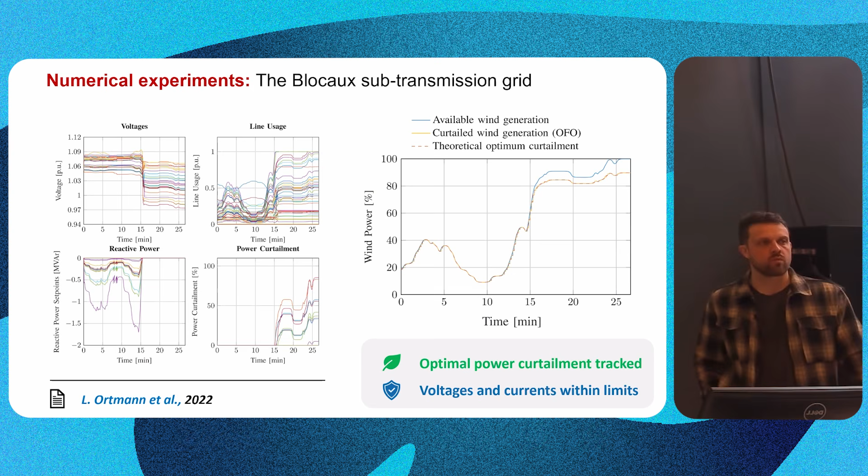I have a question about the example you showed, in which if you don't choose the sample time correctly, you can destabilize the system, right? How tight are those bounds? Are they fairly close, or not?

That's a good point. Let me grab the right slide. Which one is it? Tell me if you see it. Yeah, 41.

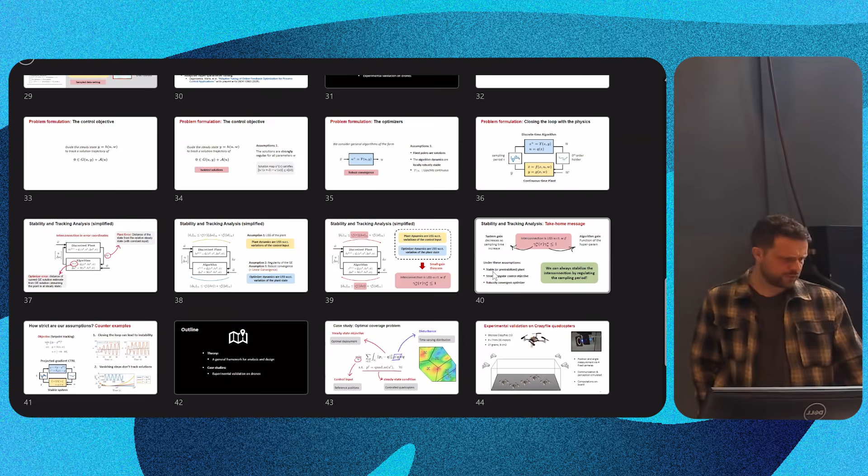So the bounds that we derive are conservative. It's sort of expected, since the framework is very general - we consider all possible convergent algorithms and all possible stabilized nonlinear plants. This example actually comes from the paper, and if you look, you see explicitly the contrast between the bound we get from the theory and the empirical bound. In that case it's fairly close. But this is a very toy example - my conjecture is that with real examples, the bounds become more conservative, very conservative.

I would say the value of this analysis, more than giving precise bounds, is to tell you what are the general ingredients in terms of plants and algorithms needed to build a functioning controller. Then it's up to you to tune things to make them work well and smoothly. Also, still on this slide - does the vanishing step size problem happen also when you do not have disturbance, or in that case could you actually use it?

Probably, if you don't have disturbance, you converge asymptotically to a solution. Also, okay. But in the real world - no, yeah, of course. Right.